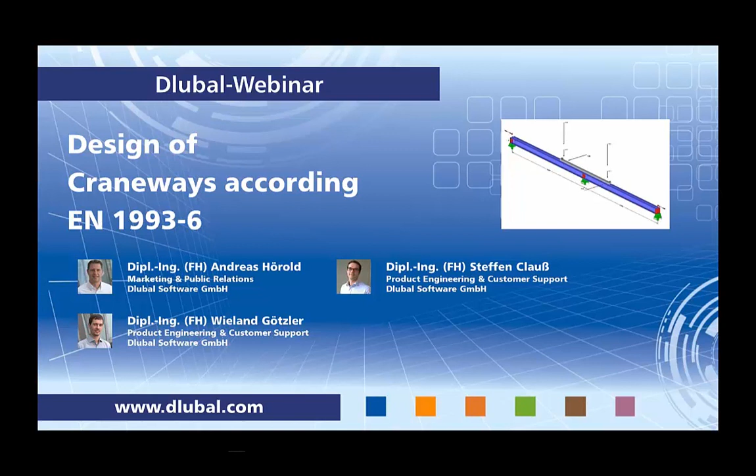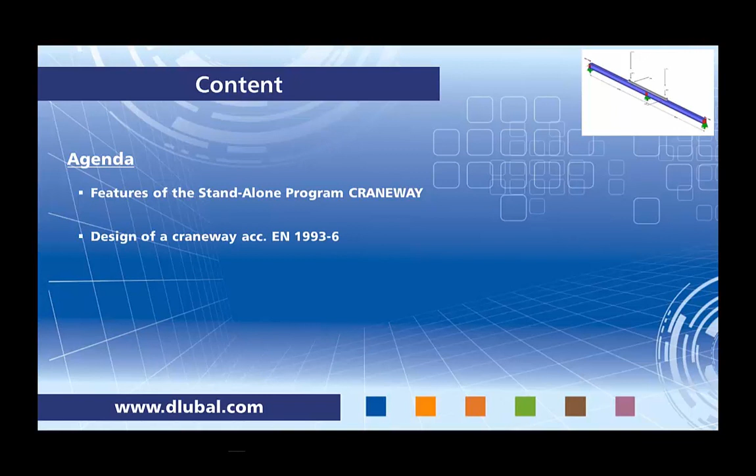Today's content is: in the first part I will show you the features of the standalone program CRANEWAY, followed by the design of a craneway according to Eurocode 3 Part 6. So first let's talk about the features of the CRANEWAY program. CRANEWAY is a standalone program, which means that it's completely independent from other programs like RFEM or RSTAB. You don't need to define different parts of the model. You just have to define the craneway itself, and this leads to a fast and comfortable modeling and design.

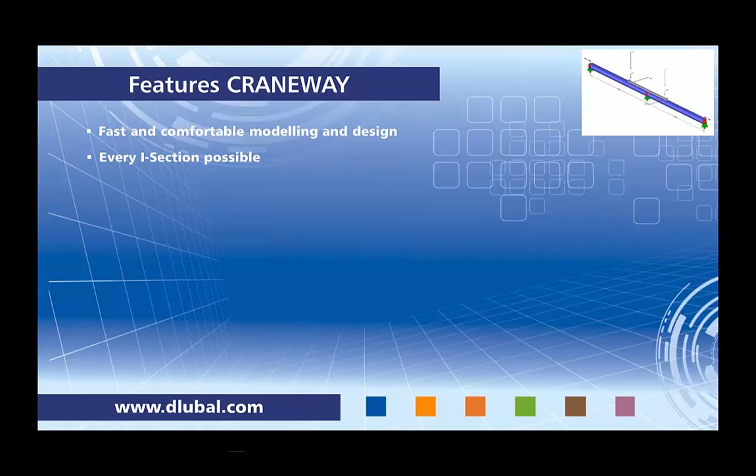You can use every I-section, like welded or rolled I-sections, and you can strengthen them by channel profiles or angles. You can define up to 3 cranes with a maximum of 20 crane axes. And one of the biggest advantages of the standalone module CRANEWAY is that you can have an automatic combination of load cases for different design situations like fatigue, ultimate limit state, or serviceability limit state.

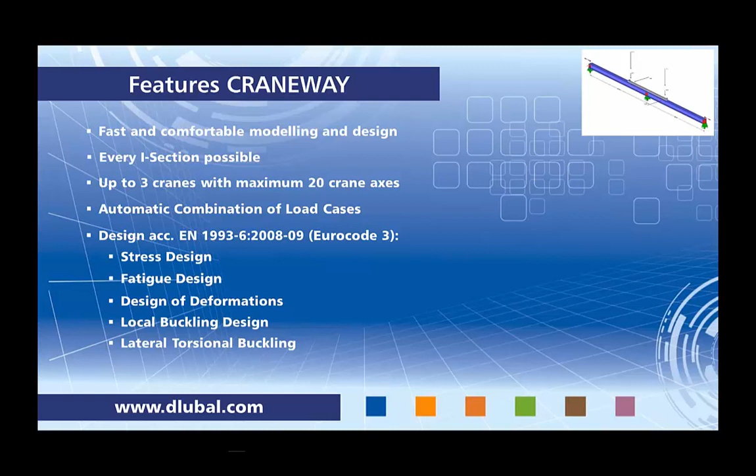The design is according to Eurocode 3 Part 6, which includes the stress design of the crane, fatigue, design of deformations, as well as the local buckling design and the lateral torsional buckling design according to P-delta method or second-order theory, including the warping of the cross-section. Another big benefit of CRANEWAY is that you can have a presentation of the results in the graphic, like deformations, bending moments, as well as a full printout, which makes a provable static calculation of the craneway possible.

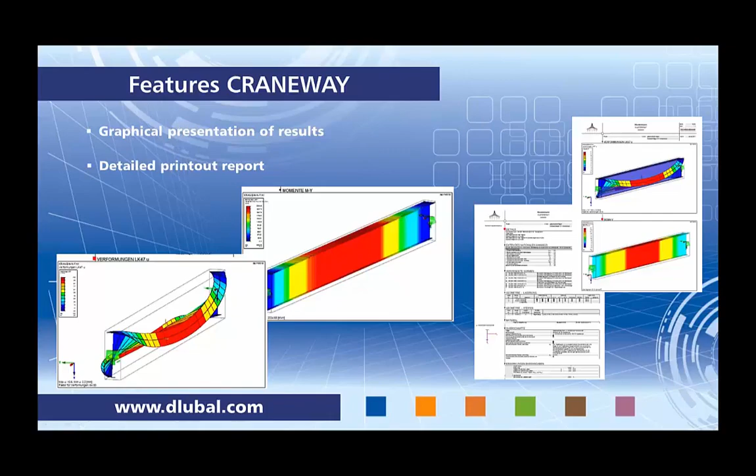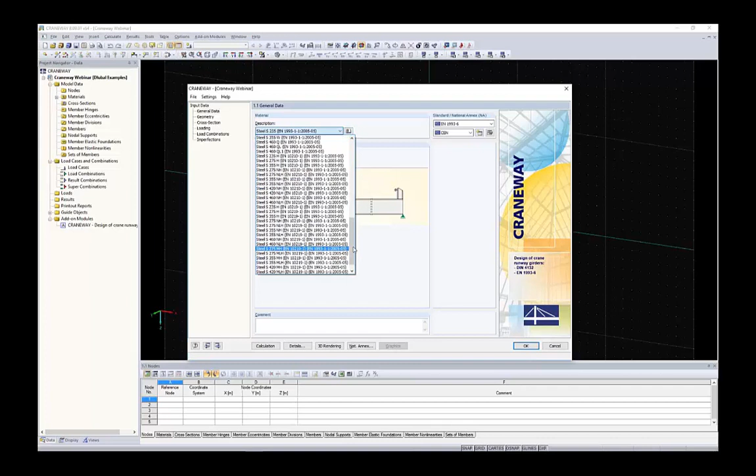Now we will just move on to the CRANEWAY program itself. It might look quite similar to you if you are already using RSTAB or RFEM. So in the first step, I will just define a model. In this case, let's say I want to define craneway webinar. And in the first mask, you have to define which material you want to use. I will just use a S355. But as you can see in the list and also on the link, you can use a material library, as you already might know from the other programs. You can define a new material if you don't find the correct one for your calculation. But in this case, I will just use the S355.

You have a design possible according to DIN 4132 for Germany, and according to Eurocode 3 for the European Union, design for several national annexes. And if your national annex is not available in the module, you can easily define a new one and change partial safety factors according to your needs. Today I want to define a bridge crane, and I want to define it according to CEN, which means the formulas and the variables which are included in the main standard and not in the national annex.

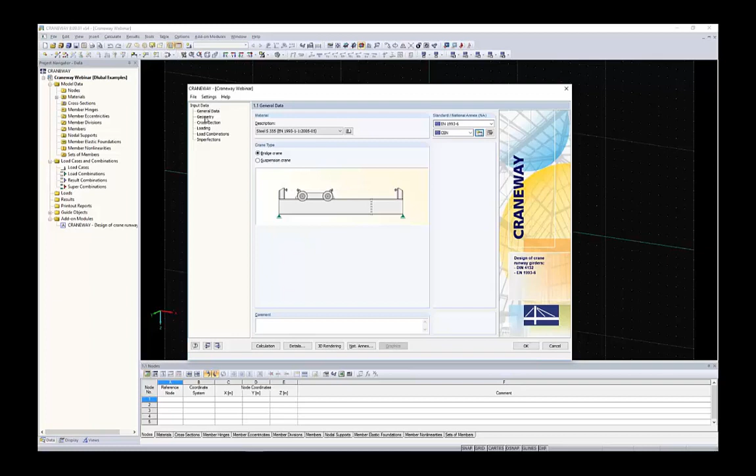In the next step, I have to define the geometry of the craneway. As in the main view in RFEM or RSTAB, you can easily rotate, you can zoom in, zoom out as you wish, and check your structure. So I like to work in isometric view. I can use this one. And today we have an example like a 28-meter craneway. And on the bottom I have to define the supports, we have an intermediate support at 14 meters length, and at the end of the CRANEWAY at 28 meters.

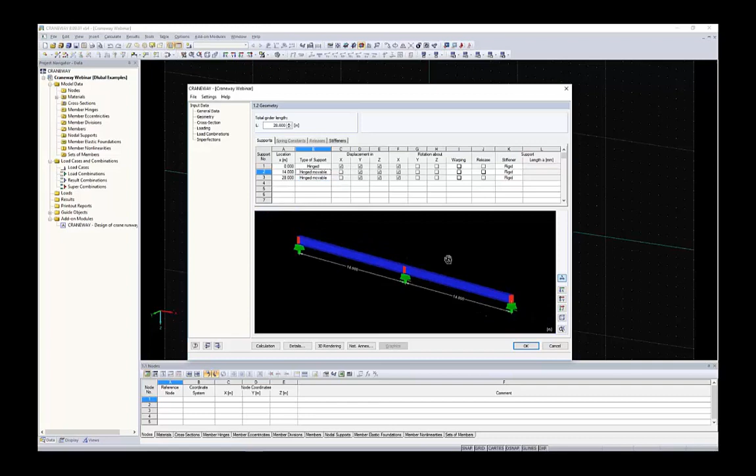There are several standard types of supports like hinged movable as an intermediate support, and it will give you the automatic definition of the displacement and rotations, which is disabled at the moment. But if you want to define a full user-defined support, you can easily use user-defined, and you have access to all the degrees of freedom. You can also use just intermediate support on the upper flange, and you can check it in the graphic. In this example, we just have hinged movable like this, and we want to define a release in the middle of the CRANEWAY like this.

In the next mask, you can also check the releases. If you define a user-defined release, you can also have access to the other degrees of freedom over there to, for example, define a shear hinge or just a normal hinge as you wish. I will just use the standard hinge in this example.

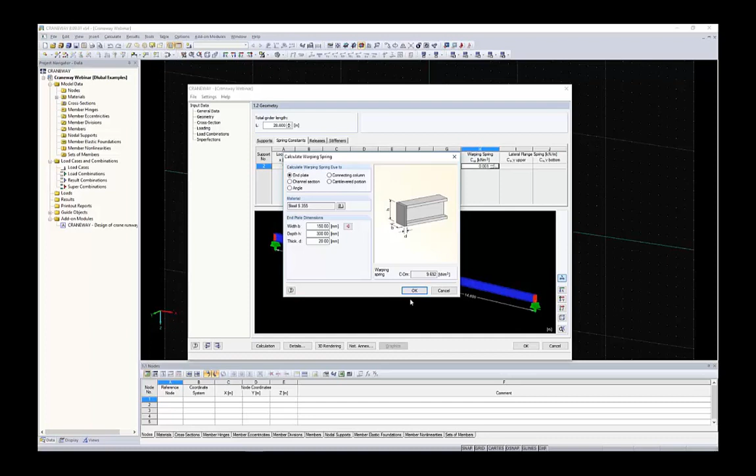You can also use warping supports or hinges as stiff, or you can also define springs in the mask over there. And with the detailed dialog over there, you can also let the module calculate spring stiffness for warping. In this example, we want to keep it simple, so we don't take the warping into account.

Let me just show you the stiffeners. The stiffeners over there are not for the calculation of the internal forces, but they will define the intermediate panels for the design of local buckling. So in this example, I want to have 6 intermediate panels on both sides as regular, or you can even use user-defined and choose whatever distance you want.

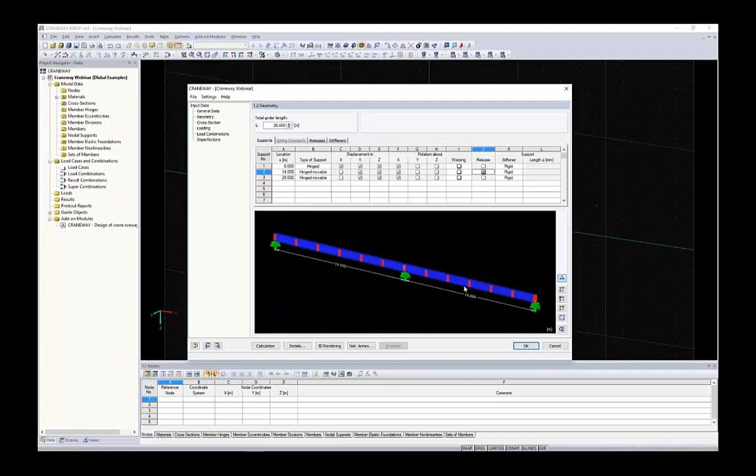Okay, regular 6 panels, and that's okay with the definition of the craneway itself. We can just continue to the next dialog, which is cross sections. There, on the first step, you can choose between rolled or welded sections. Let me take a look at the rolled sections. You have a filter on the left side for several manufacturers and standard groups.

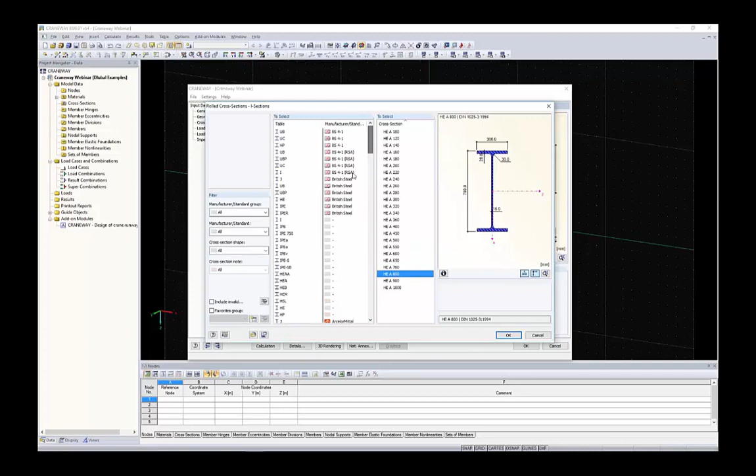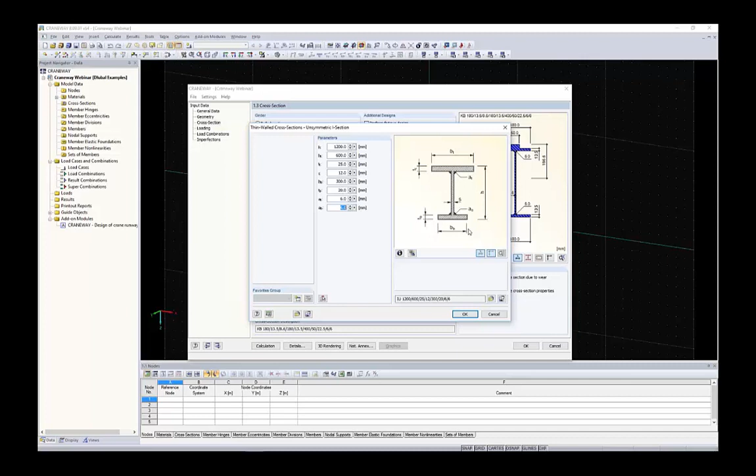That means you have quite a big library of possible I-sections, for example, ArcelorMittal or standard sections, British Steel, for example. In this example, I want to use a welded section, which is quite easy to define. You just have to define these dimensions over there, and the example is 1200 millimeters high, 600 millimeters is the upper flange, 12 millimeters as the web. The width at the bottom is 300 millimeters, 20 millimeters thickness, and the welds both are 6 millimeters. Okay.

The next is to define a rail section. You can use a splice, like a flat bar on the upper flange. As you can see on the right, you can also take a look at the cross section over there. Define the splice, or in this example, I want to have an SA 75 section, like this one. Okay.

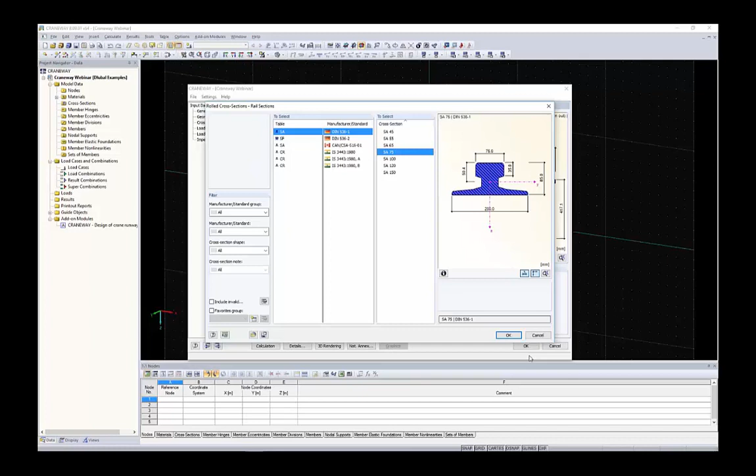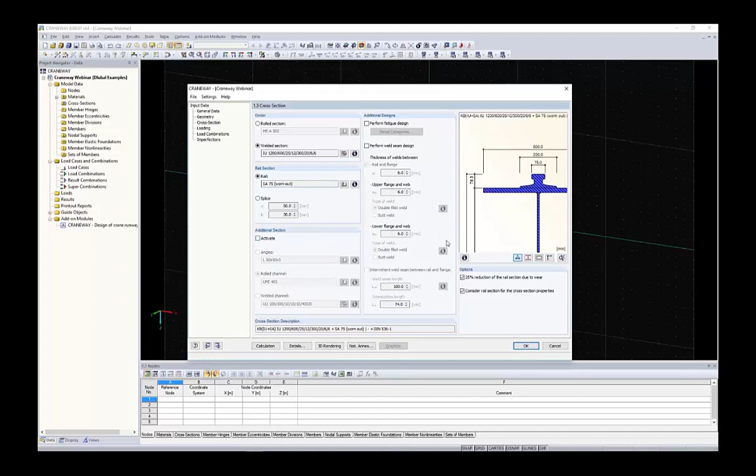On the bottom, you can define stabilizations or strengthening sections like angles on the flange, or rolled sections, which in this case is not possible for this section with a width of 600, but I can easily deactivate it and just continue with this one.

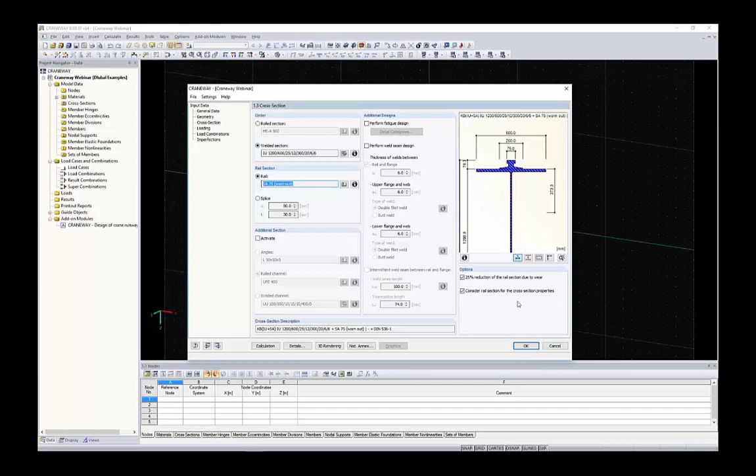On the right side, you can also see that you can take the wear of the rail section into account defined by the standard. As you can see, the section properties are modified automatically. You don't have to do anything. You get some info in the section of the rail. And in this case, I have elastic support under the rail, so I don't want to take the rail section into account for the section properties. I will just switch this checkbox off.

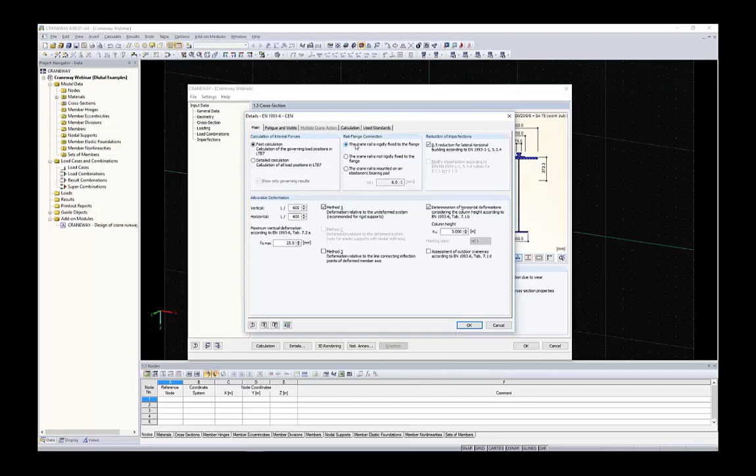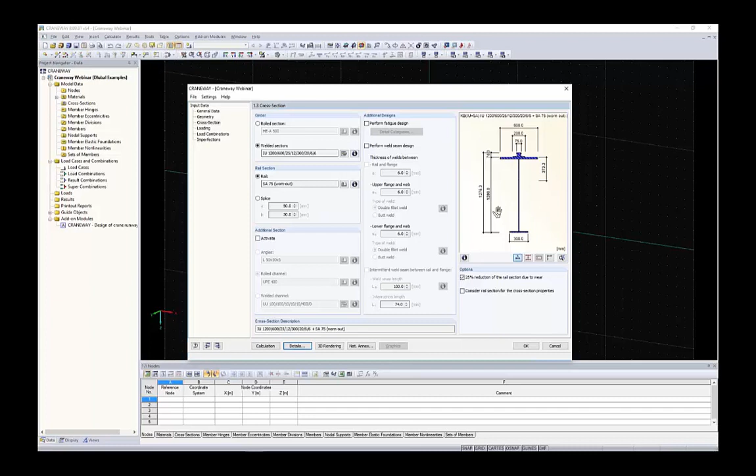And in the details dialog, in the middle of that, you can see that you can define the rail flange connection. In this case, as I said, I don't want to take the rail into account. That means, as I said, we have an elastomeric bearing pad with a height of 6 millimeters, which is fine. Okay. And with this definition, we can just switch to the next mask, which is the loading.

So on the top of the loading mask, you can define how many cranes you want to design on the craneway. In this example, it's just one. We have a girder buffer on both sides, and we want to design both girders. That means with maximum and minimum loading.

Crane description, this is what you usually get for the static calculation. That means you have a crane you want to take into account, and in this data sheet you will find all the loading, the name, and the S-class for this crane. For this example, I have, let me take a look, a 17 tons crane. The S-class is S5.

And over there you can see the dynamic coefficients, which should be clearly visible in the data sheet of the crane, whether the loads you have to define over there already include the dynamic coefficients, or they are without.

If they are without the dynamic coefficients, you have to define it over there. So in this example, I have to define 1.1 as phi1 and 1.38 as phi2. The rest of the values are already okay,

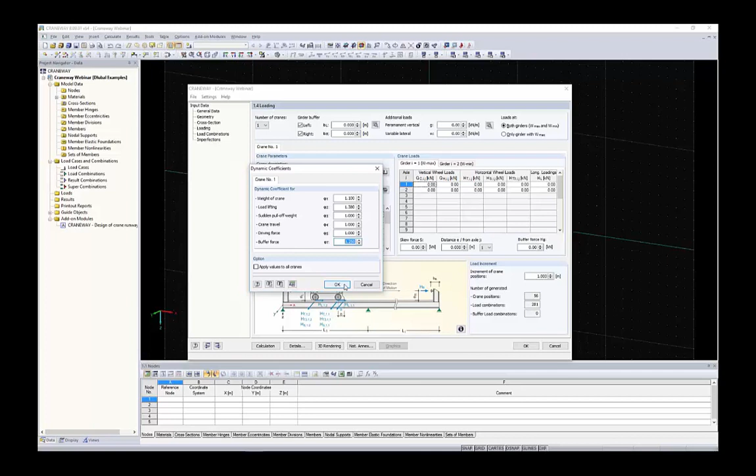like this. And we have a crane buffer of 5 centimeters on both sides. That means the crane can run along this length of the CRANEWAY. You will see this in the graphic later. We have 4 crane axes in this example, and the distances between the crane axes are 2 meters, 5.6 and 2 meters.

And the loading I have already prepared in a small Excel sheet. So I will just copy the loads from this sheet by selecting the cells, and Control V, paste the loads over there. We have a minimum load on girder 2, because I want to design both girders. And we also have an additional skew force, minus 20.1. Okay.

Now on the bottom you can see we have an increment of crane positions of 1 meter, and it means that we have 56 crane positions. And this leads to 281 load combinations. If you define, let's say, 10 centimeters, you get almost 2,000 load combinations,

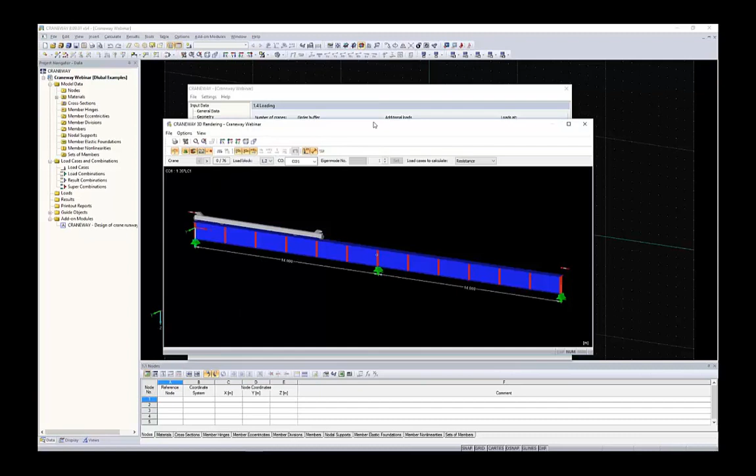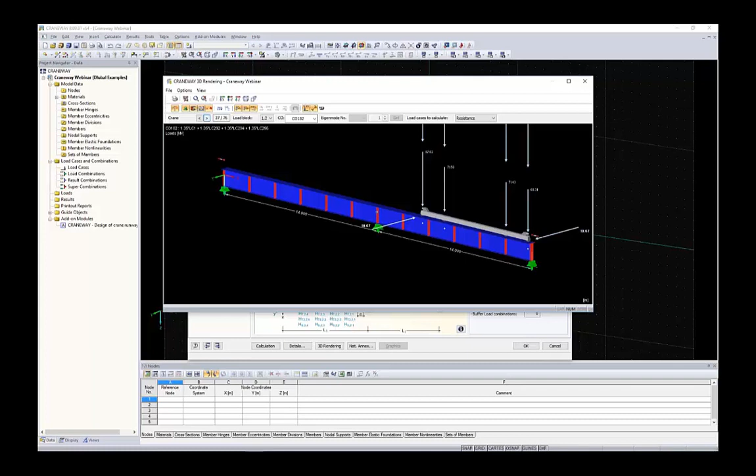You can take a look in the graphic, the 3D rendering over there, and there you can check the definition of the crane. We have 4 crane axes with these distances, 2, 5.6 and 2 meters, and this is basically the calculation which is done later when you press the calculation button. The program will calculate all the load positions, load blocks and combinations according to Eurocode 3.

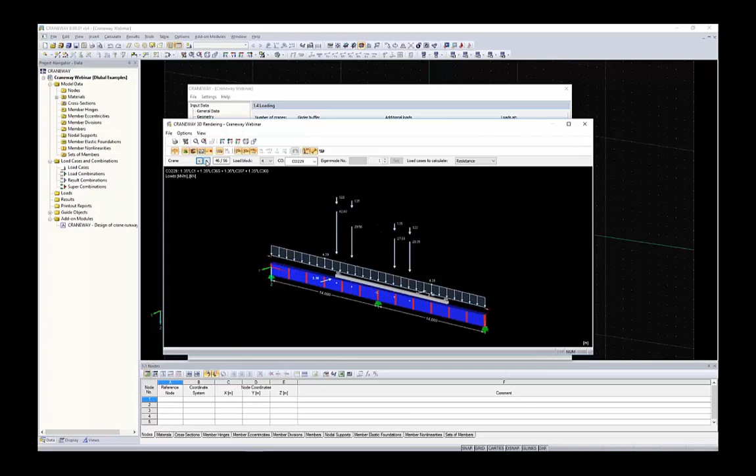When you just switch back and define a buffer of, let's say, 5 meters on the right side, check the rendering again, let me take a look, load block 1 and 2. This is this one, you can see there's a distance of about 5 meters on this side. The loads are not appearing above the support over there. But on the left side, the loads will be above the support at the X location of about 0 meters.

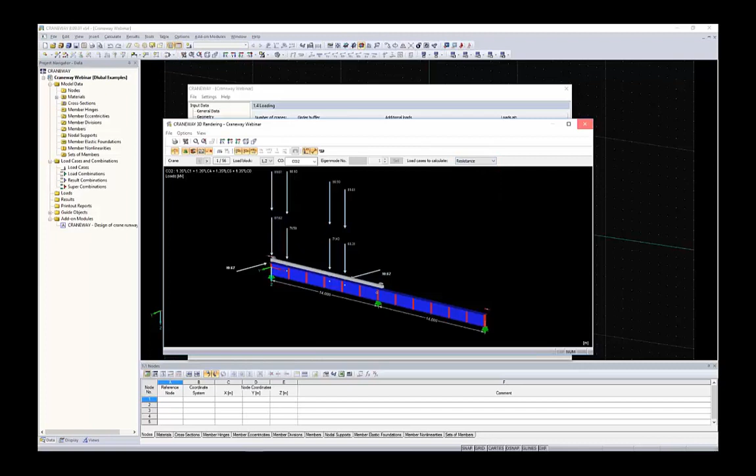So you can check all the load combinations and all the crane positions in the graphic, for the resistance, for fatigue and for deformations. Let me just switch back to the crane buffer of 0.5 meters. This is also what you can use in CRANEWAY if you have more than one crane and you want to keep the distance between the cranes. You have to define the buffers.

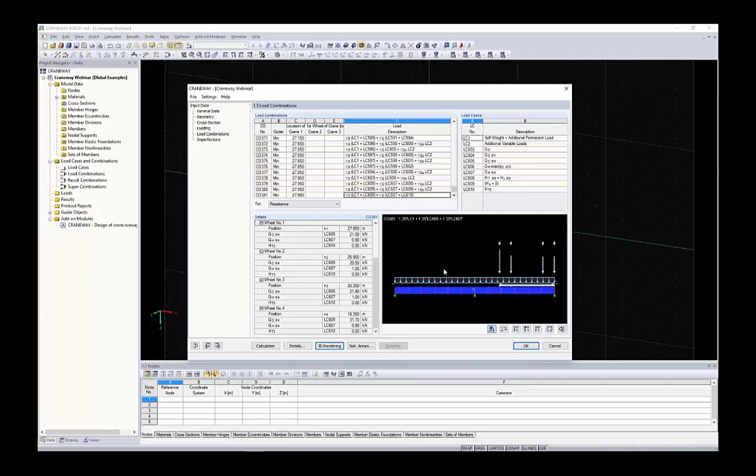So in this mask, I think we are finished and we can take a look at the load combinations. This is more like an overview for you. You can see that for the resistance, you have 381 load combinations with the partial safety factors, with the crane positions and so on. If you imagine doing this manually, it would be really time consuming to get all these load positions and combinations done. And in this case, it's a very big advantage, I would say.

Let's take a look at the imperfections. Imperfections you can either define manually in the module, or the program CRANEWAY will define them automatically for you according to the buckling curve, and it will apply the imperfection according to Eurocode 3 automatically. So right now I can just run the design.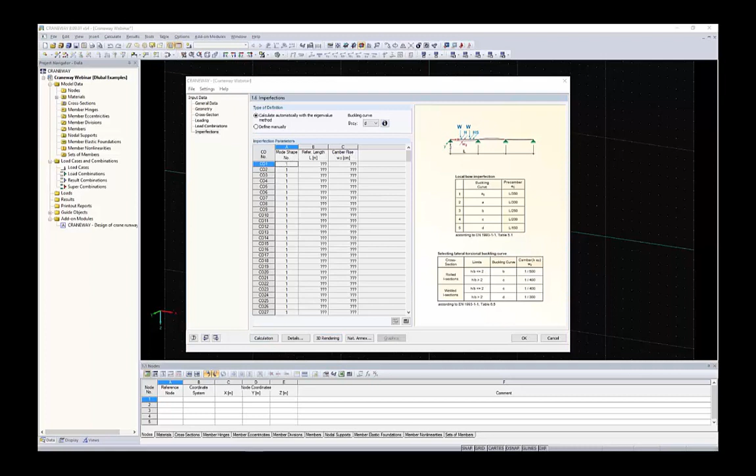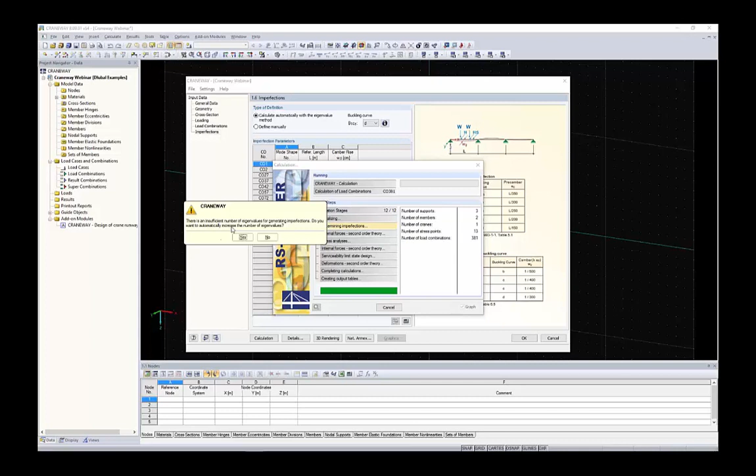It will take some time for the 381 load combinations. There are two ways of calculation implemented in this program. You have a fast calculation, which means the design will run according to first order theory first, and then the worst load combinations and design situations will be designed according to P-delta or second order theory calculation method, including imperfections, including warping of the construction. So if you imagine designing all the design situations and combinations according to P-delta, including imperfection and warping torsion, it would be even more time consuming, and therefore we have a fast calculation and a detailed calculation. If there's a warning hint like insufficient number of eigenvalues, in this case we want to increase the number of eigenvalues.

So these are the 12 design combinations we have. Of course, in this design situation 77, we have to design according to the P-delta method, but it's less than the 381 before.

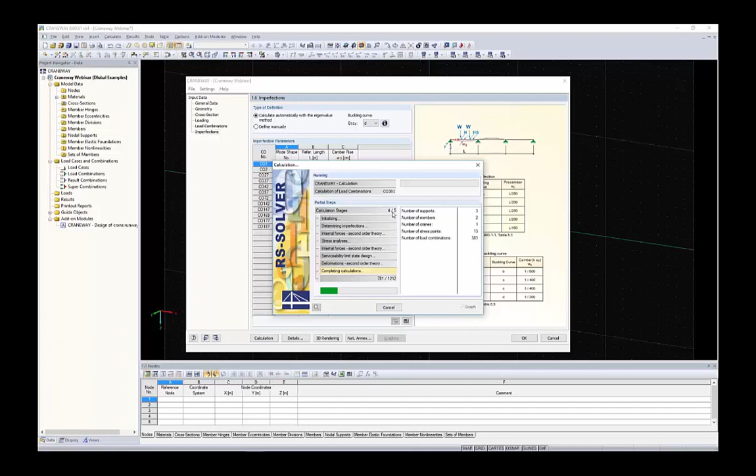Now the calculation finished, and you get a design summary like in other additional modules. For example, Steel EC3, you get results as a design summary, internal forces, support forces, stress analysis, and so on. So in the first step we want to take a look at the stress analysis, which is fulfilled by this criteria.

We have a governing load combination 142, and you get a full stress design, for example shear stresses, sigma Z, sigma X stresses, up to the equivalent stress, which shows that the design is fulfilled.

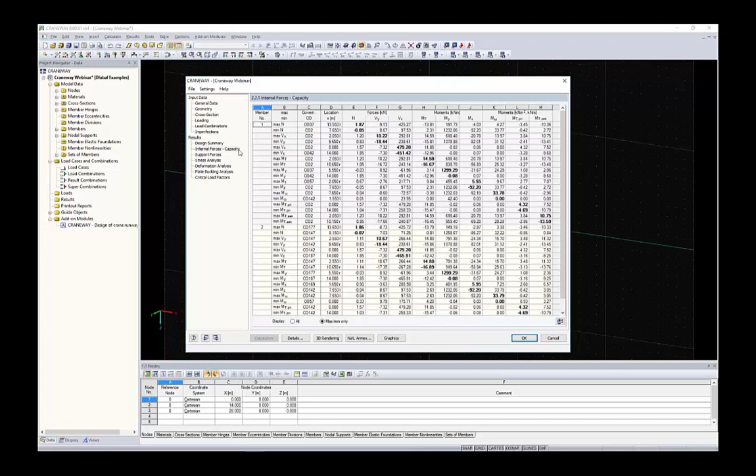You can also take a look at the internal forces as well as the support reactions. And with the File Export Tables button, you can also export these support reactions, for example to have them for further work in RFEM or RStab.

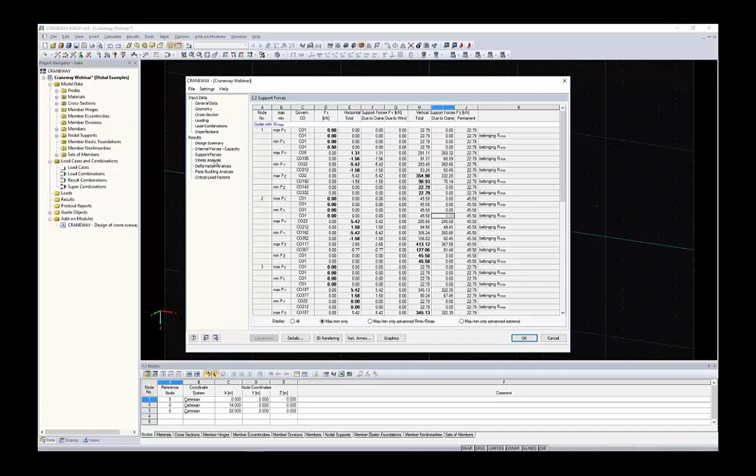You get also the plate buckling design, and what might also be interesting for you are the critical load factors for several load combinations.

The module also gives you the opportunity to get the welding and fatigue design, and this is what I want to perform now. So I switched back to the cross-section mask and activate fatigue design as well as the weld design. We define the weld thickness of 6 millimeters over there in the cross-section.

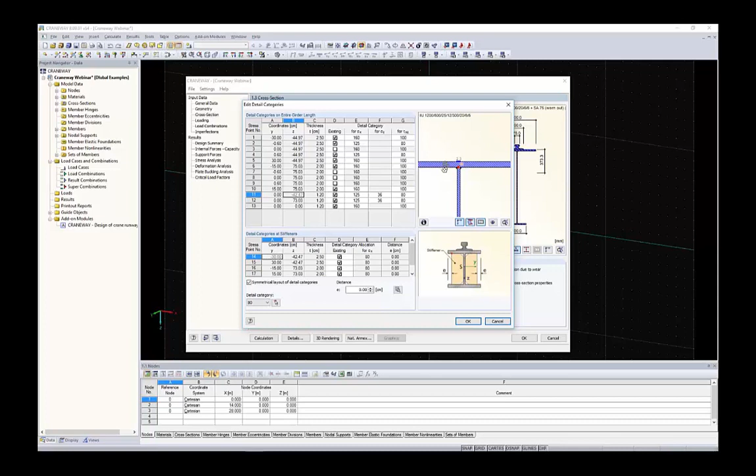First we want to try it as a double fillet weld. When you take a look at the detail categories, you get all the details for several stress points along the cross-section. You can also check the position of the detail category in the graphic.

When you click on calculation, you can see it's quite fast, since it doesn't calculate the internal forces again. And you can see that it's quite overloaded, the fatigue design is about 400% now, and therefore I have to modify something.

You can also take a look at the overloading detail like sigma X, and when you look at that, it seems to be okay. But on the bottom you can see the sigma Z stresses, and this seems to be overloaded. So therefore, over there you can see the sigma Z stress is overloaded, and I have to improve something.

What I can do now is switch back to the cross-section dialog, and I will change the weld of the upper flange and the web over there. You can take a look at this graphic, and in this case I want to use butt welds. That means the web is fully welded through at this position. I just have to change the radio button over there.

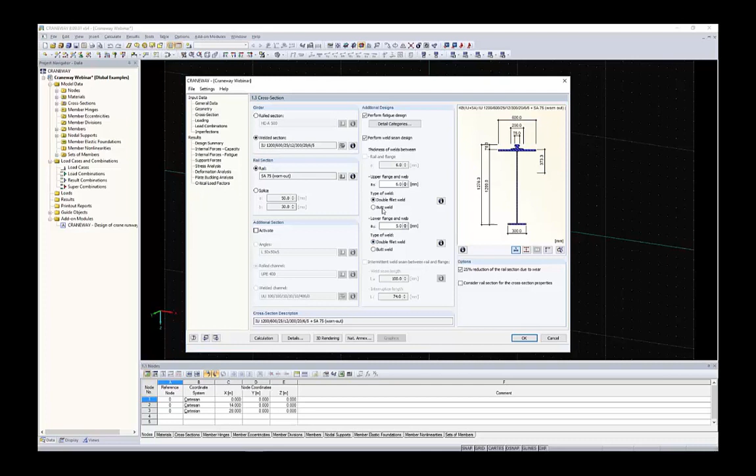This was a small fault because it's still overloaded. I changed the type of weld on the bottom, but I want to have it on the top of the web instead. Run the calculation again, and now you can see it's fine.

Fatigue design over there. We can also take a look in the detail of the fatigue, and this seems to be okay now.

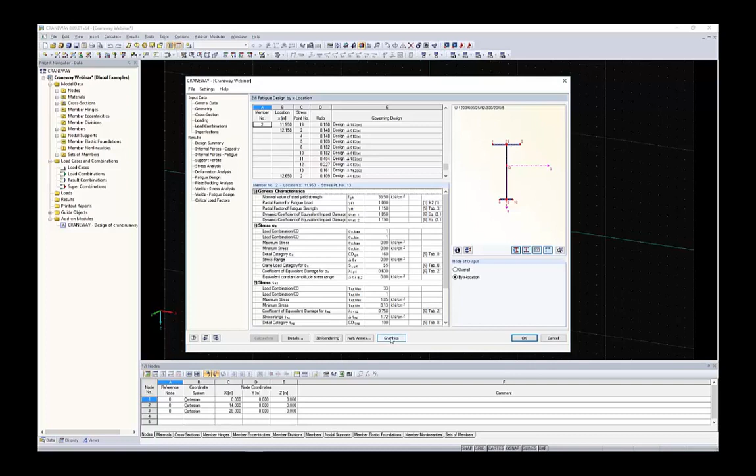You can check all the results in the graphics, but you can also take a look with the Graphics button over there to have a bigger view in the program.

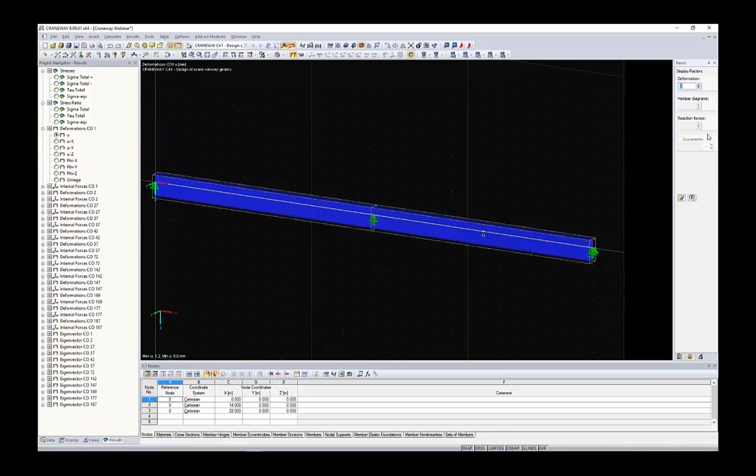You can also change the way of displaying the deformations, for example. This is a sigma stress, so first of all I want to change the deformations to U. I can increase the display factor just a bit, but this looks not very satisfying in this case, because just a line for deformations isn't too useful, I would say.

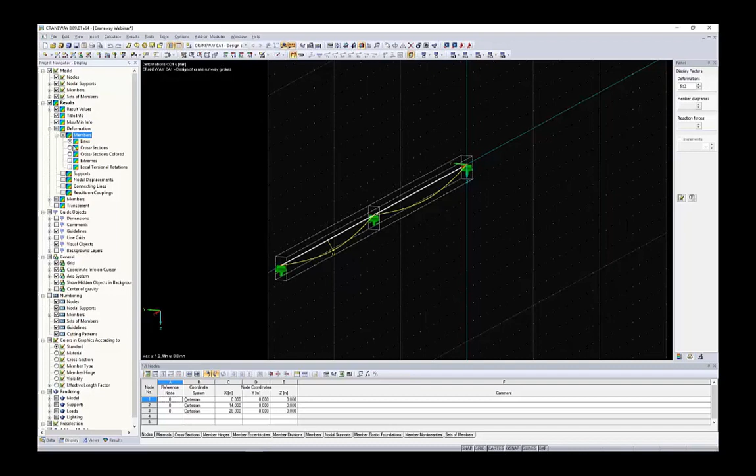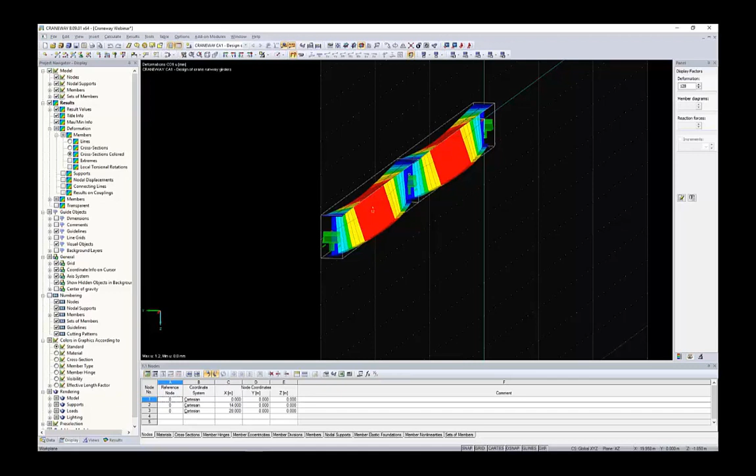So in the display dialog over there, you have the results and deformations for members, and you can easily change to cross-sections colored. Reduce the scale just a bit, and there you can see that it looks like lateral torsional buckling deformation in this case, because I think it's the ultimate limit state, including the imperfection according to the first eigenshape, which is, I think, the lateral torsional buckling.

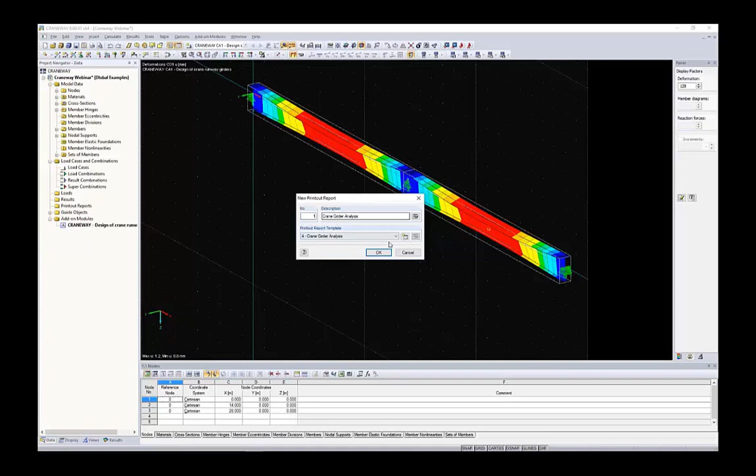At the end of the calculation, the question is how you can send this to someone to prove the calculation, so we will just create a new printout report. You have templates available, and I want to use the crane girder analysis as a template. Let's just open the printout report.

As you can see, the printout is currently in German, so let's easily change the language to English. Even in this case, you can have a design according to the English language, and you can also change to Italian, Spanish, or whatever you want to send the static calculation to a different country than you are working in.

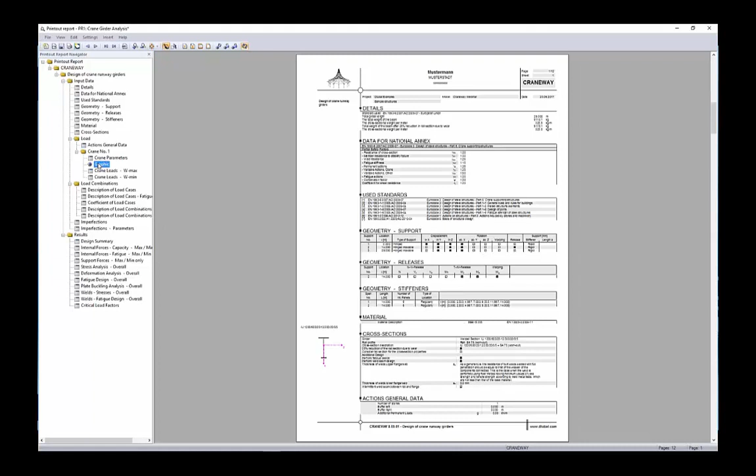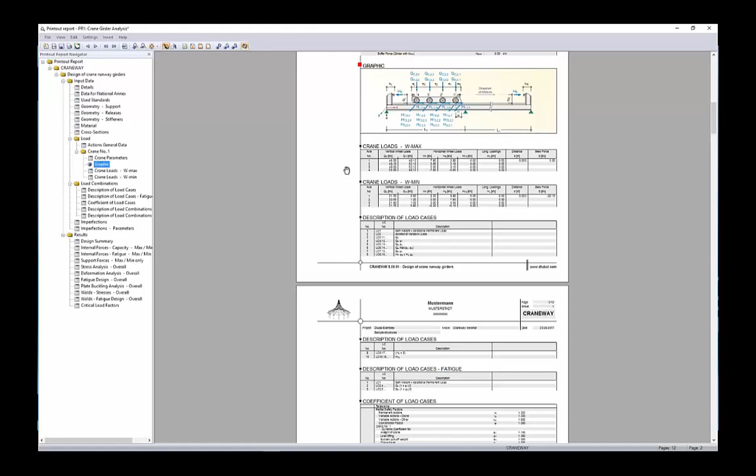Like in other programs, you get the possibility to print graphics. This graphic of the crane is defined automatically to give an overview of the loads you've defined. When you close the printout report and save it, if I want to have this shape in the printout, I can easily print it to report number 1. I only want to have the current one.

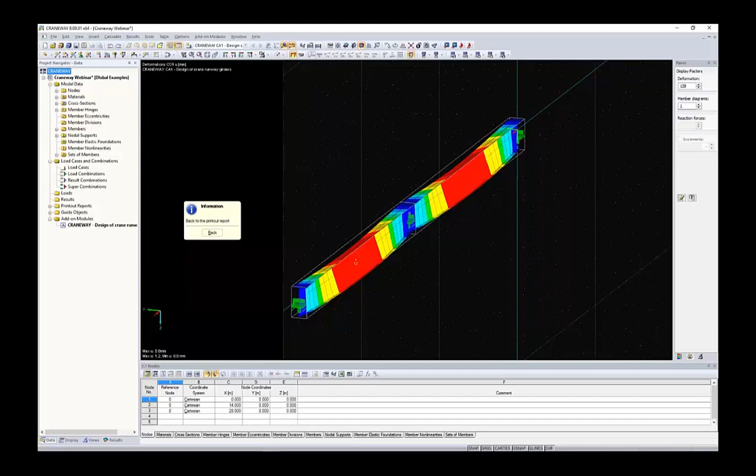And now you get the deformation of the craneway in design combination 1. If you have some mistake, no problem - you can easily click the edit button and change it, let's say, to the other side. Zoom in, click to go back to the printout report, and you have modified the graphic.

All right, let's save the printout. You can also use the mass print function. Let's say you don't want to have only the deformations for combination number 1 - you want more combinations. No problem - you can use the printer button again, but change to mass print settings.

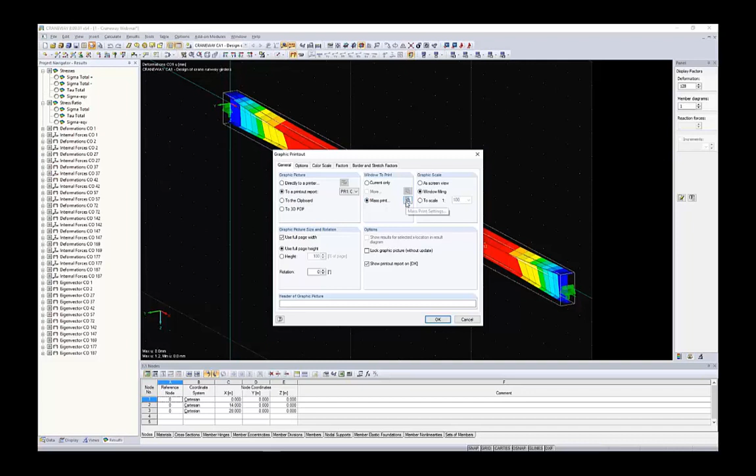I want to have the results of, let's say, deformations combination 1, deformations combination 2, and combination 27 of the current view.

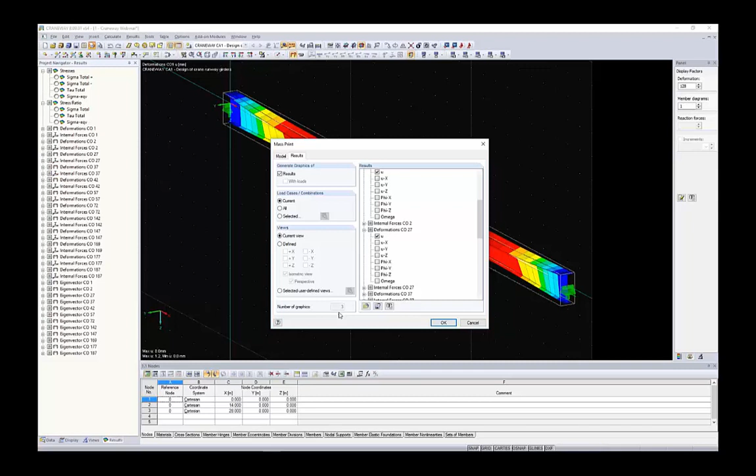You can see you get 3 graphics added to the printout report. Window filling, this is okay, and now you get 3 more prints for combination 2 as well as combination 27. So you don't have to print each graphic again and again - you can easily print the internal forces and deformations in just one process.

All right, let me just take a look at the questions you've sent to us.

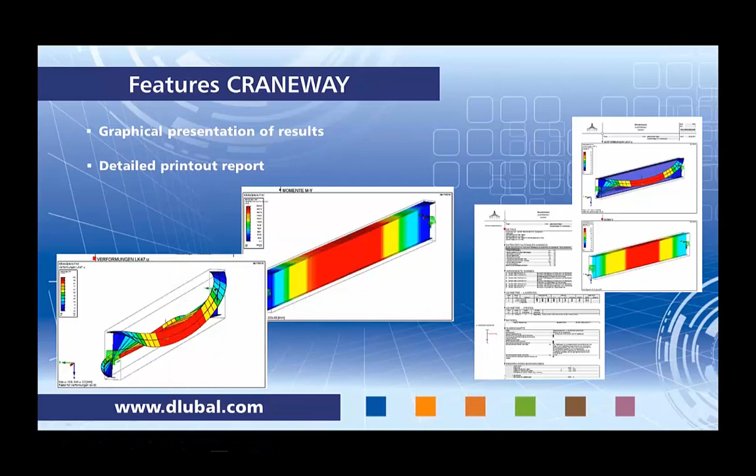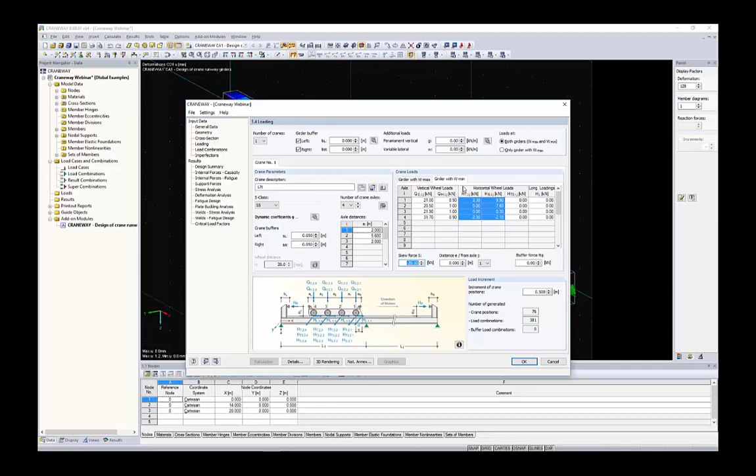We are pretty much at the end of the presentation, so let me give you some additional information.